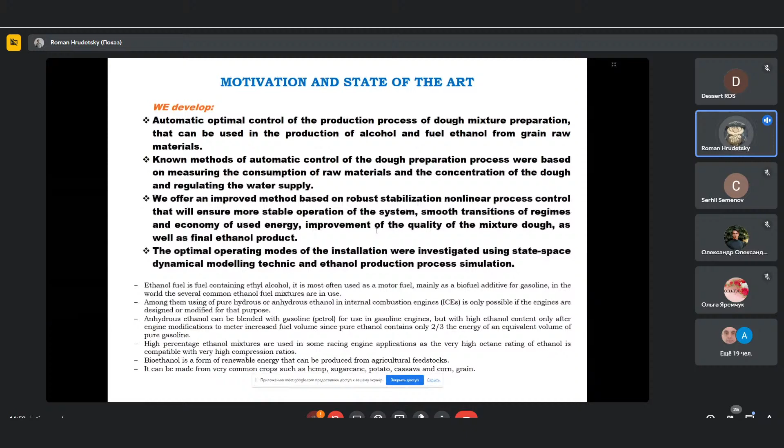dough mixture preparation that can be used in the production of alcohol and fuel ethanol from grain raw materials. Known methods of automatic control of the dough preparation process were based on measuring consumption of raw materials and the concentration of dough and regulating the water supply.

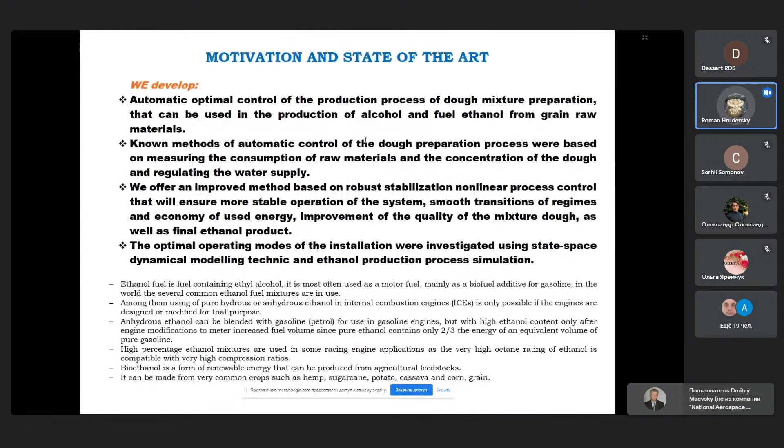We offer an improved method based on robust stabilization, non-linear process control that will ensure a more stable operation of the system, smooth transition of regimes and economy of used energy, improvement of quality of the mixture dough as well as the final ethanol product. The optimal operation modes of the installation were investigated using state-space dynamical modeling technique and ethanol production process simulation.

From 2007 to 2008, the share of ethanol in global gasoline type fuel use increased from 3.7 to 5.4%. In Ukraine, today, in the condition of the military aggression and war against Ukraine, and in view of issues of energy security and stable function of the fuel market, these initiatives are gaining special relevance.

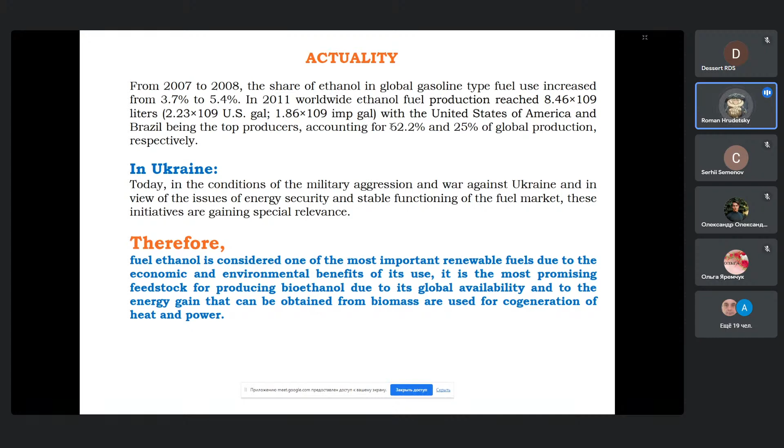Therefore, fuel ethanol is considered one of the most important renewable fuels due to the economic and environmental benefits of its use. It is the most promising feedstock for producing bioethanol due to its global availability and to the energy gain that we can obtain from biomass and use for cogeneration of heat and power.

We developed automatic optimal control of the production process of dough mixture preparation that can be used in production of ethanol from grain raw material. Known methods of automatic control of the dough preparation process were based on measuring consumption of raw materials and concentration of dough and regulating the water supply.

We offer an improved method based on robust stabilization nonlinear process control that will ensure a more stable operation of the system, smooth transition of regimes, and economy of used energy, improvement of quality of the dough as well as the final ethanol product. According to the proposed method, the concentration of raw material is determined and the regulation of water supply is carried out according to a non-linear law.

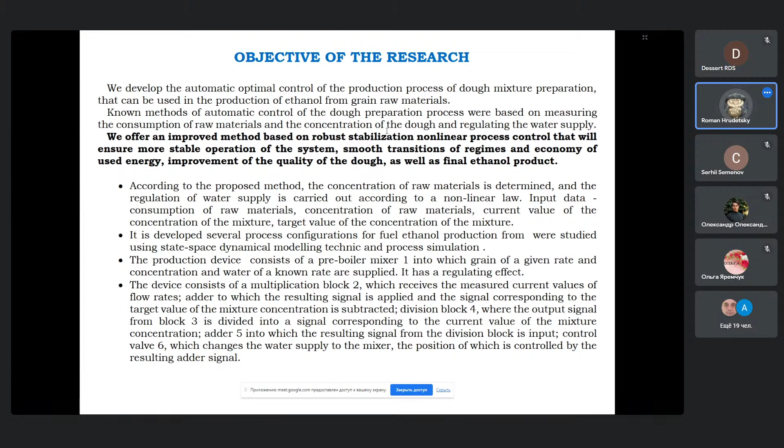Several process configurations for fuel ethanol production were studied using state-space dynamical modeling technique and process simulation. The production device consists of pre-boiler mixer 1, into which grain of a given rate and concentration and water of known rate are supplied.

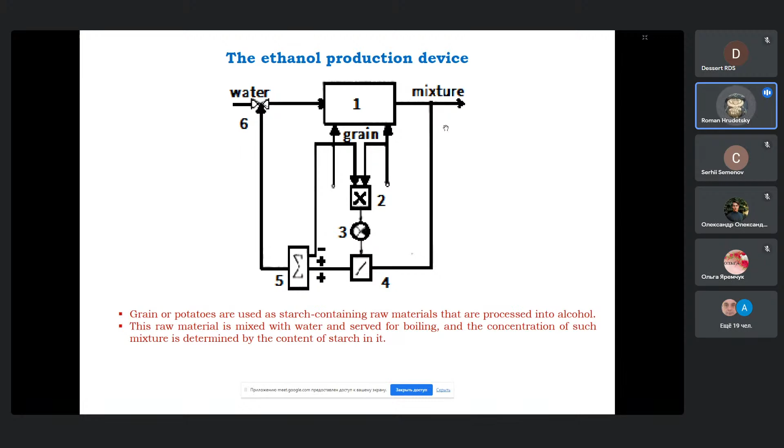The device consists of multiplication block 2, which receives measured current values of flow rates, adder 3, to which the resulting signal is applied and the signal corresponding to the target value of the mixture concentration is subtracted, division block 4, where the output signal from block 3 is divided by a signal corresponding to the current value of the mixture concentration, adder 5, into which the resulting signal from the division block is input, and control valve 6, which changes the water supply to the mixer, the position of which is controlled by the resultant adder signal.

To ensure homogeneity of the mixture, it is mixed with a propeller stirrer. The purpose of boiling raw material is to release starch from plant cells and convert starch into a soluble state. The modeling method allows you to avoid big mistakes during the implementation of production and accelerate its development. Many processes cannot be studied in industrial devices due to the impossibility of arbitrarily changing their mode of operation.

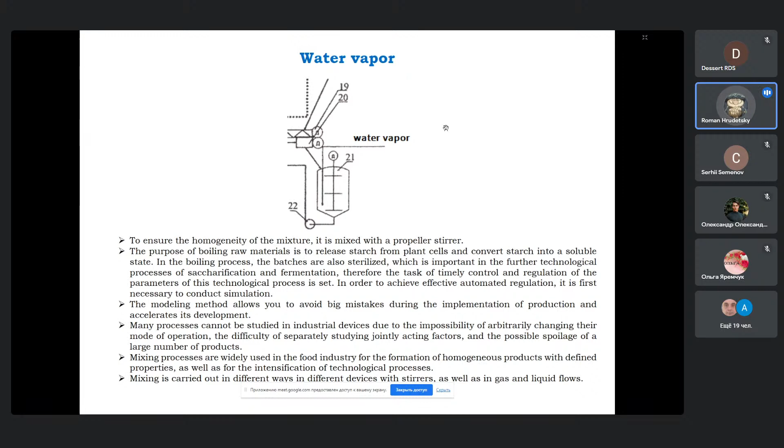The main results are: we develop a robust control strategy on the minimization of the energy efforts of the ethanol production plant in the presence of small perturbations of states from the position of equilibrium. To solve this problem, we consider the state-space model technique. This model includes linearized equations and full feedback taking into account nonlinearities.

In order to choose the correct response, a control selection center uses mechanical states to select the amount of response necessary to counter the disturbance. This center evaluates the difference between an estimated state and desired state and chooses appropriate trajectory and feedback gains. The control selection center effectively chooses appropriate gain matrices. The motor control system is meant to receive a desired state vector from experiments, compare it with the measured state, and generate control commands.

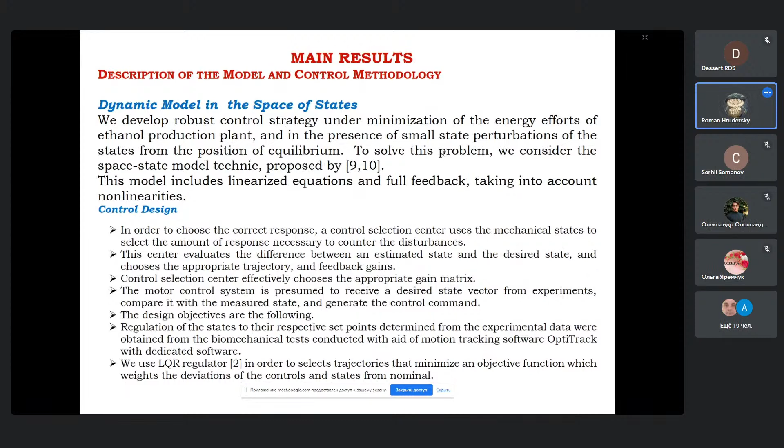Model experimental data were taken from an ethanol production installation used at most plants in Ukraine. Necessary experimental tests were conducted in real time in order to provide further analytics in the MATLAB environment, and MATLAB experimental testing in order to perform an analysis and obtain real data from control law simulation as reference values.

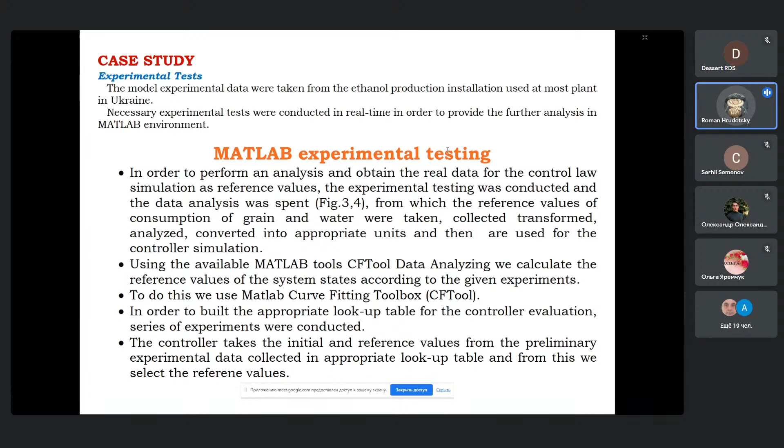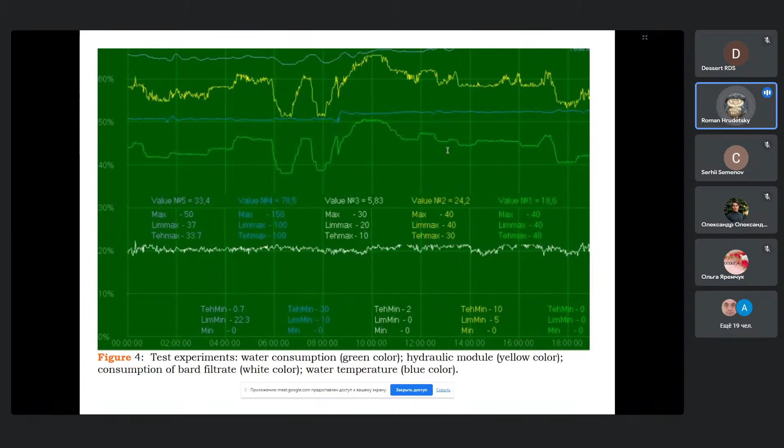Using available MATLAB tools, CF tool data analysis, we calculate reference values of system states according to given experiments. To do this, we use the MATLAB Curve Fitting Toolbox. And in order to build an appropriate lookup table for controller evaluation, a series of experiments were conducted. The controller takes initial and reference values from preliminary experimental data collected in the appropriate lookup table, and from this we select reference values.

We use the MATLAB function ODE45 for system simulation and the control system toolbox to solve the Riccati equation. With the aid of the MATLAB function care, we compute the solution X of the Riccati equation. Driving the state and control to the reference values, we manipulate and weighting matrices R and Q, and they can be chosen so as to penalize excessive exertion of control inputs and the desired reference state variables, desired values of volume of liquid in the tank and the mixture concentration respectively.

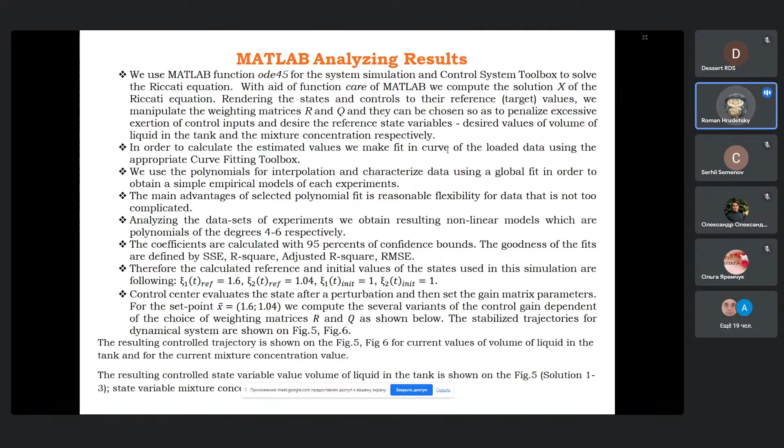The resulting controlled trajectory is shown in figure 5 and figure 6 for current values of volume of liquid in the tank and for the current mixture concentration value. The resulting controlled state variable value, volume of liquid in the tank, is shown in figure 5, and the state variable mixture concentration in figure 6.

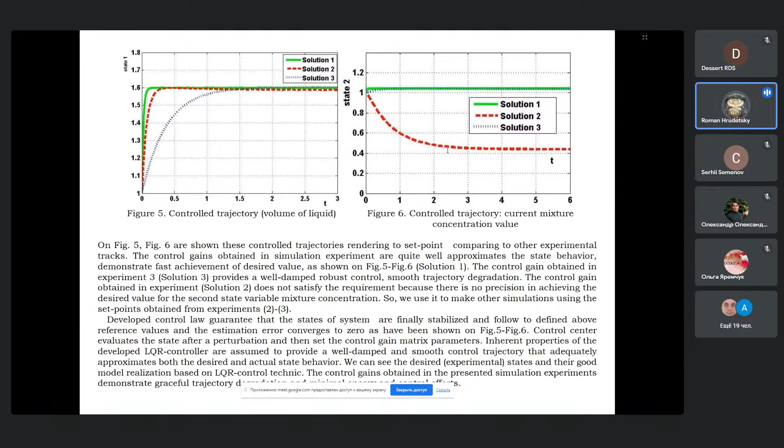Conclusions. In this paper, we have developed automatic optimal control of the production process of dough mixture preparation that can be used in the production of alcohol and fuel ethanol from grain raw materials. The developed improved method is based on robust stabilization nonlinear process control that will ensure more stable operation of the system, smooth transition of regimes and economy of energy use, improvements of quality of the mixed dough as well as the final ethanol product. We can see the desired state and its good model realization based on the LQR control technique.

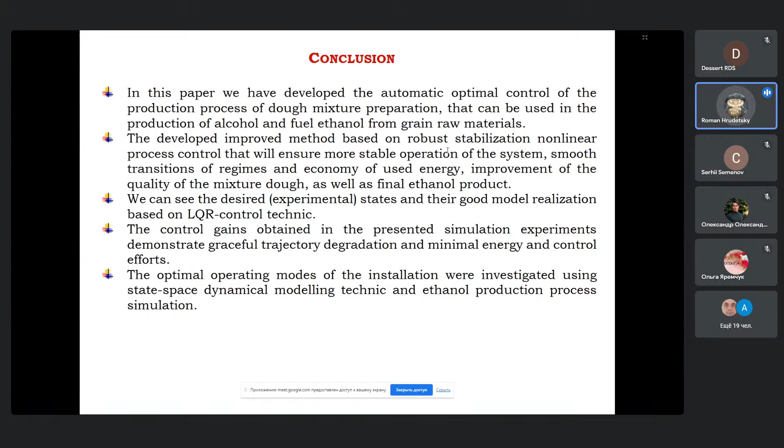Control gains obtained in the presented simulation experiments demonstrate a graceful trajectory, degradation, and minimal energy and control effort. Optimal operation modes of this installation were investigated using state-space dynamical modeling techniques and ethanol production process simulation.

Vitaly, we cannot see your screen. Please share your screen. Can you open your slide? No. Maybe Vitaly will solve his technical problems, and we will go to the next one, and after this, the report will be Vitaly's. Okay. Can you open, Vitaly? We can hear you. No, we cannot see your slide.